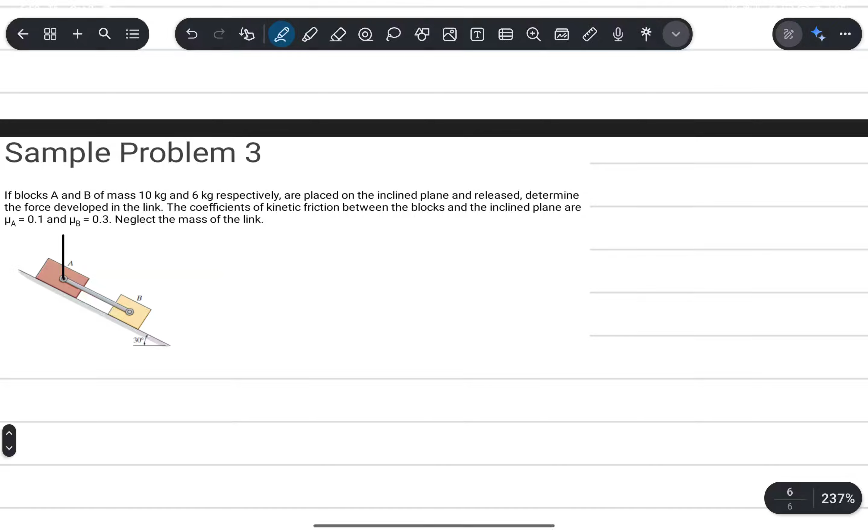So, block A and block B have a mass of 10 kilograms and 6 kilograms.

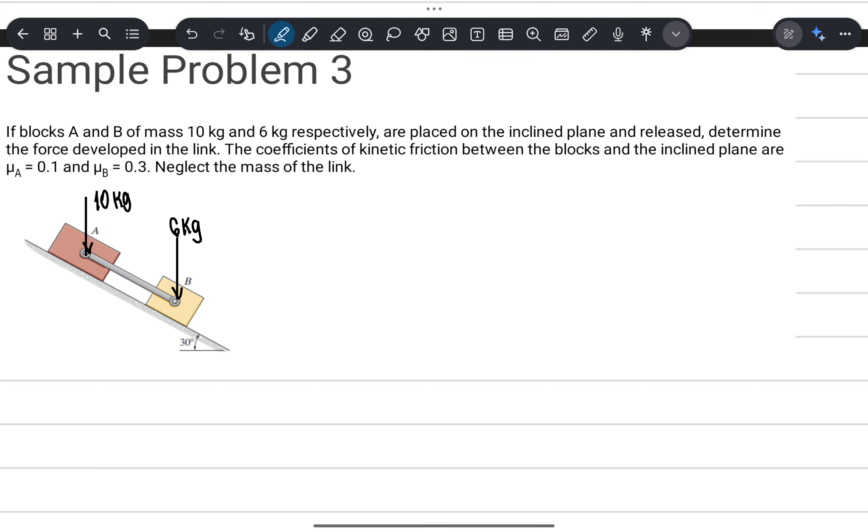Next, they are placed on the inclined plane and released. Determine the force developed in the link. The coefficient of kinetic friction between the blocks and the inclined planes are 0.1 for mu A and 0.3 for mu B. Neglect the mass of the link.

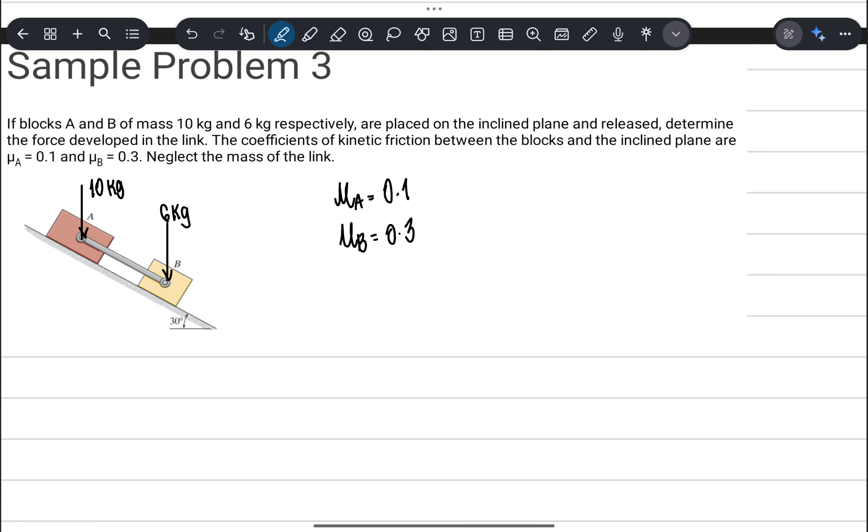So what are the forces acting on it? Let's start with the normal force. So this is the normal force at A, and this is the normal force at B.

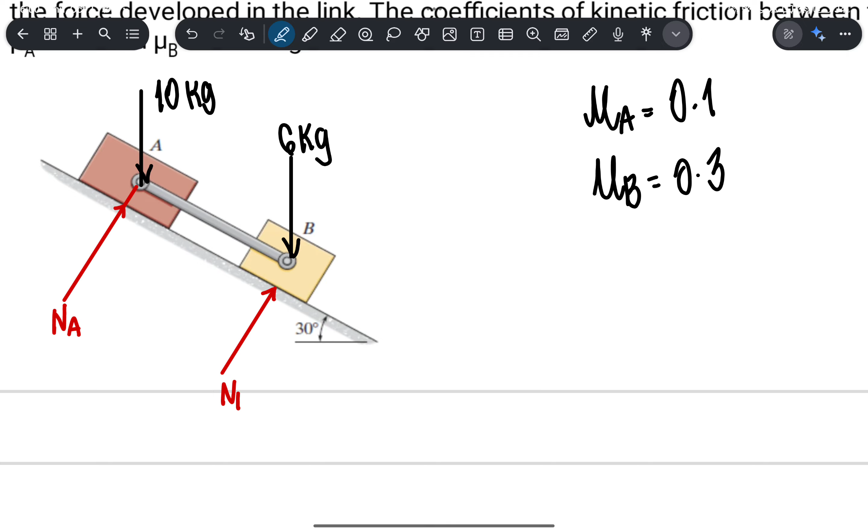Okay, and where's the acceleration for this? Inclined at 30 degrees. So this is the acceleration. Where's the friction?

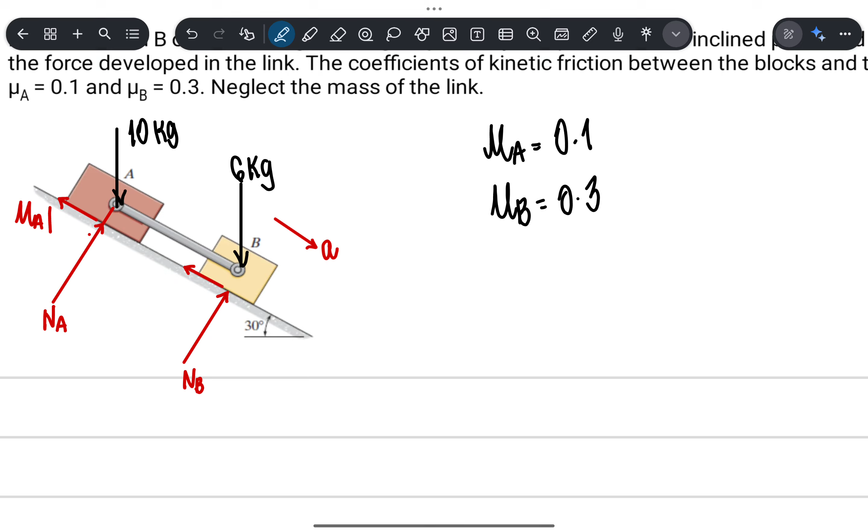So this is mu A times NA, and this is mu B times NB. Okay, now let's consider block A first.

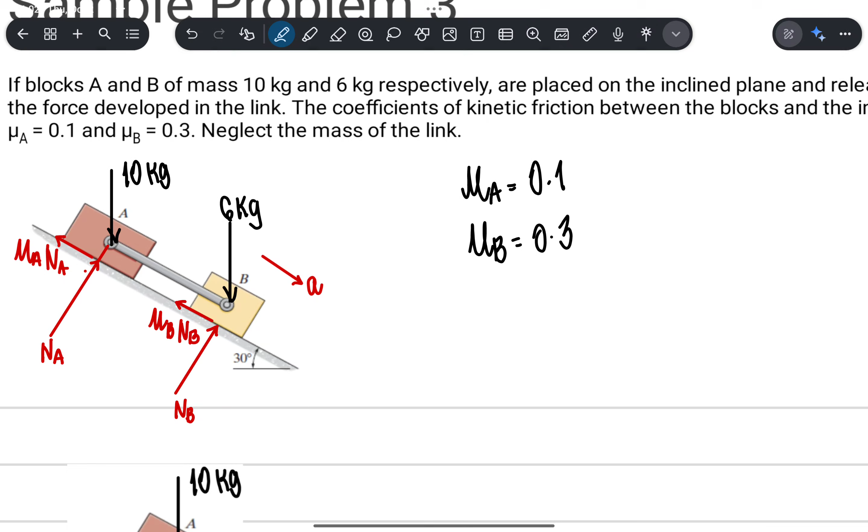So if it's tension, it pulls the member. So this is the tension at the link, or the force P, so it looks nicer.

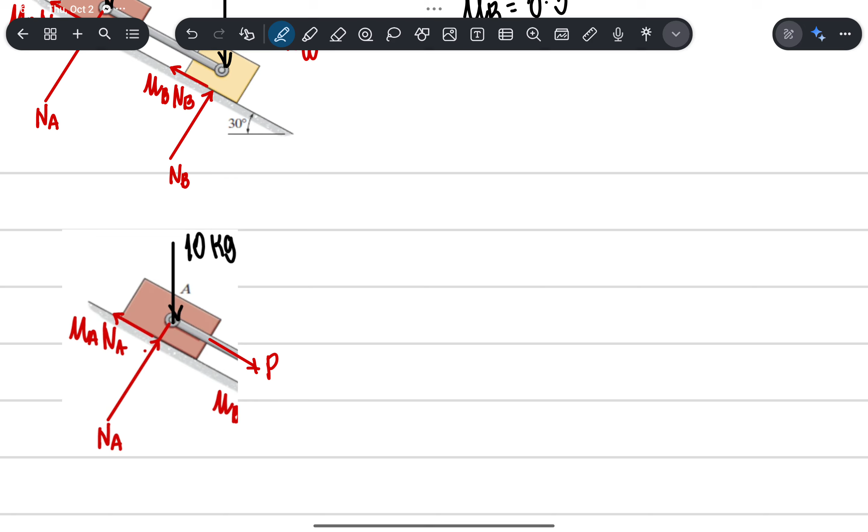So our axis is now there. So what's the angle here? What's the angle here? 30 degrees. Again, from the horizontal, it becomes from the vertical now.

So using the summation of forces along Y prime, and this is X prime. Using summation of forces along X prime is equal to... Y prime first, sorry. Y prime is equal to 0. So what are the forces along Y prime?

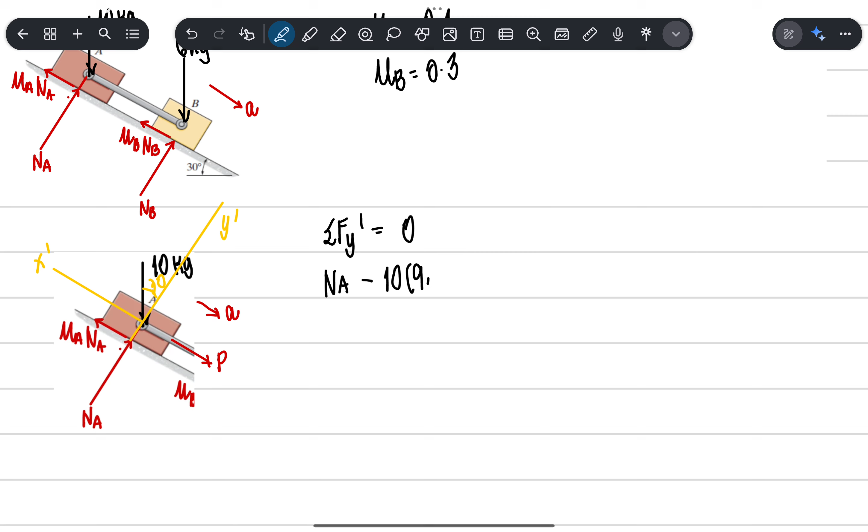NA, minus 10 times 9.81 since it's just resting, times cosine of 30, equals 0.

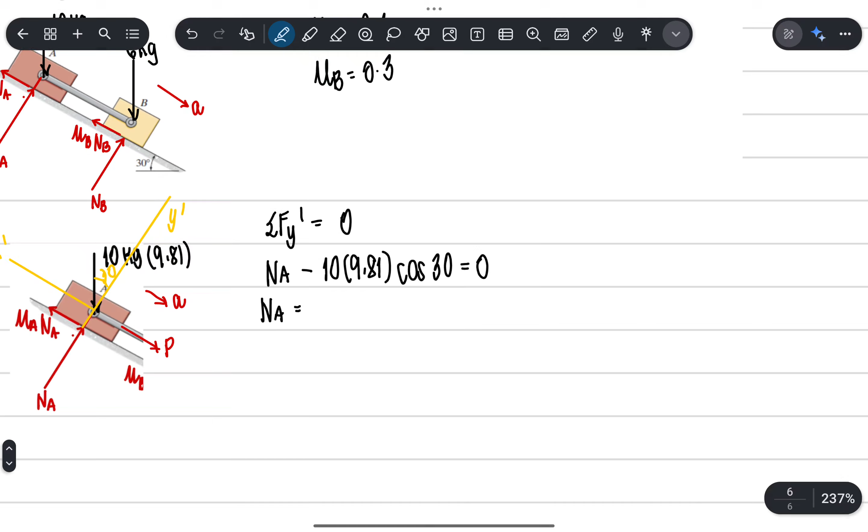So how much is NA? In Newtons. And then using summation of forces along X prime is equal to...

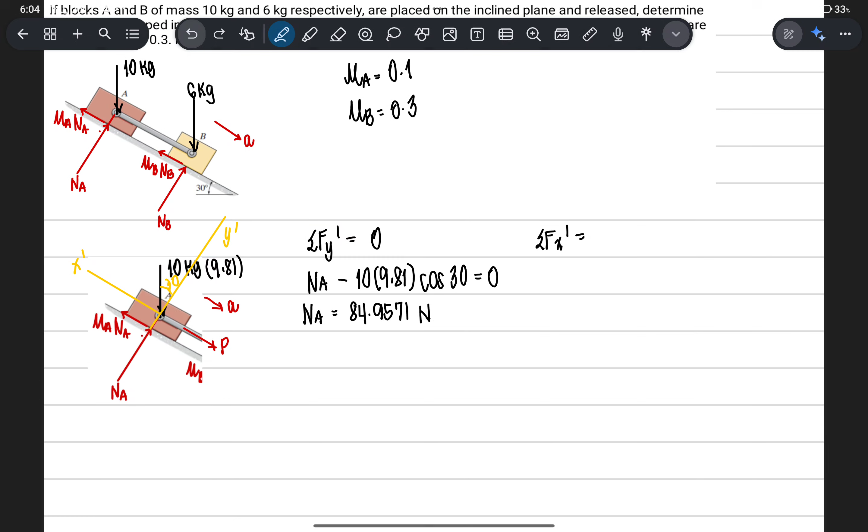MA, because that's where the acceleration is. So what are the forces? Assuming to the right is positive. So we have P minus... what's mu of A? 0.1.

Times 84.9571 minus... plus 10 times 9.81, sine, let me just move this, doesn't matter, sine of 30.

Anything else? None. Equals M, what's its mass? 10, times the acceleration. So we have P and A.

So let's just transpose. P minus 10A is equal to... this constant, we move it to the other side, or subtract both sides.

How much is it? Positive 40, or negative? Negative 40.55. This is our equation 1.

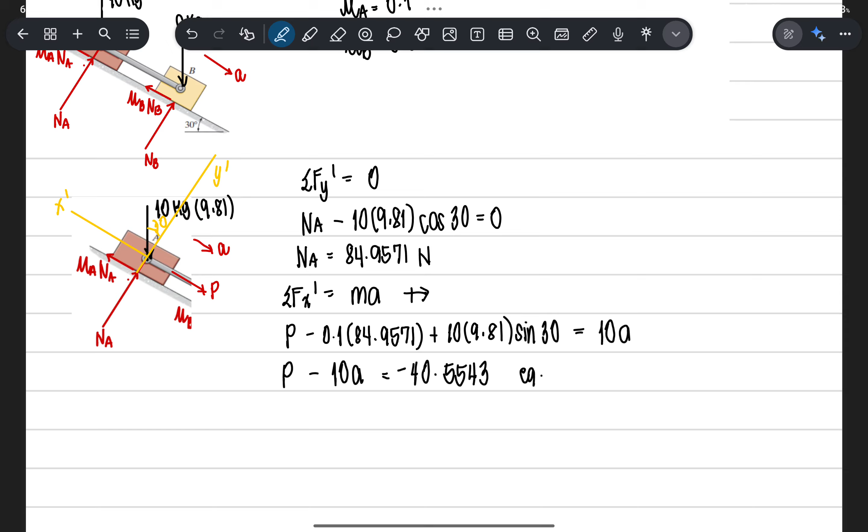Then next, considering block B. Save. Okay, did you follow? Again, the free body diagram is very important.

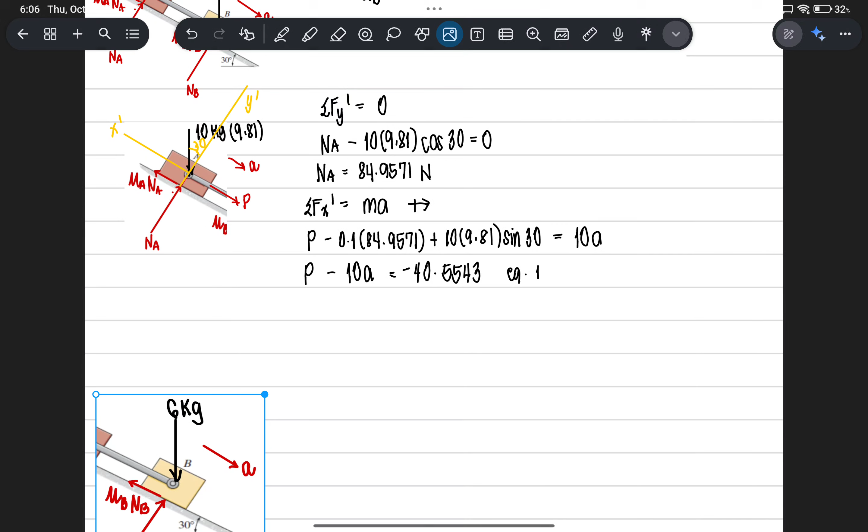So again, our tension here, so this is the force P. Let's rotate our axis again. So this is the angle 30, multiplied by 9.81. This is Y prime and this is X prime.

So using the summation of forces along Y prime is equal to 0. So what are the forces? There's NB, minus 6 times 9.81 cosine of 30 equals 0.

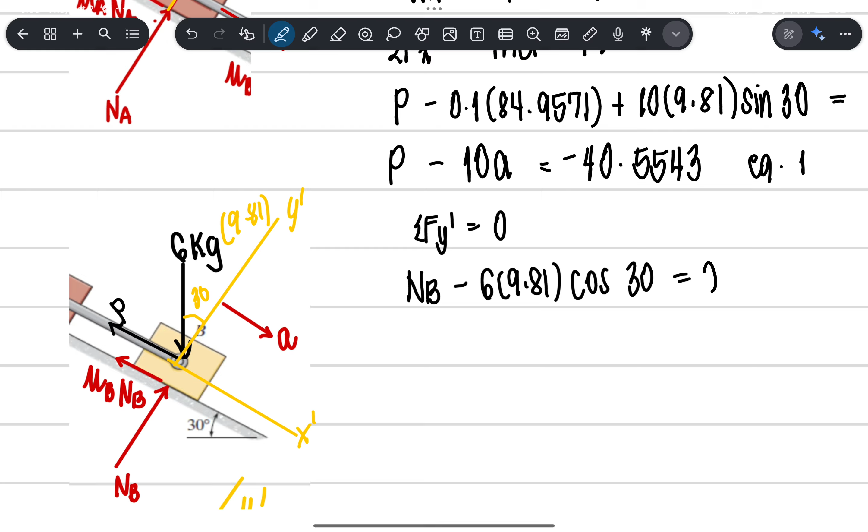So how much is NB? 50.9743 Newtons. And then, using summation of forces along X prime is equal to MA.

So the forces to the right are negative P minus 0.3 NB, so 50.9743 - is 0.3 correct? Correct, 0.3 - plus 6 times 9.81 sine of 30 is equal to 6A.

So transposing, we have negative P minus 6A is equal to positive, negative... negative 14.1377.

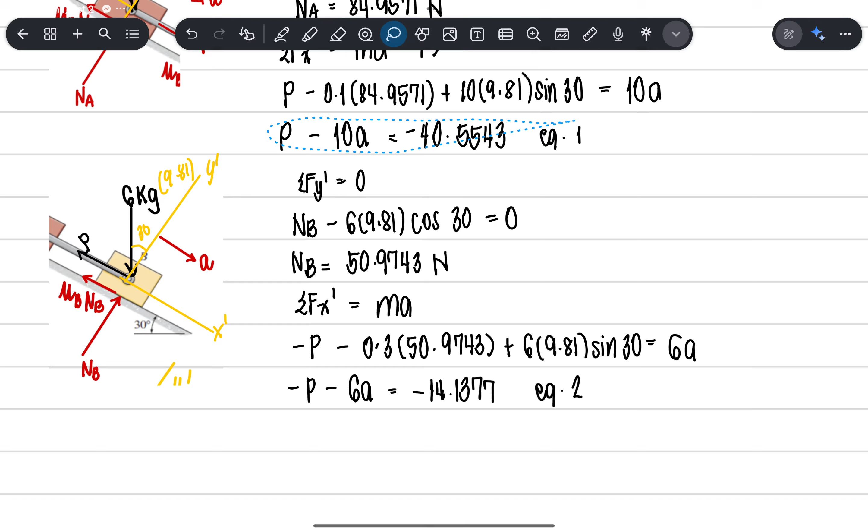Equation 2. So combine the two equations, equation 1 and equation 2. So how much is P and A?

P is equal to negative... 6.3718 and the acceleration is 3.418. So that means our P is 6.3718 Newtons, compression.